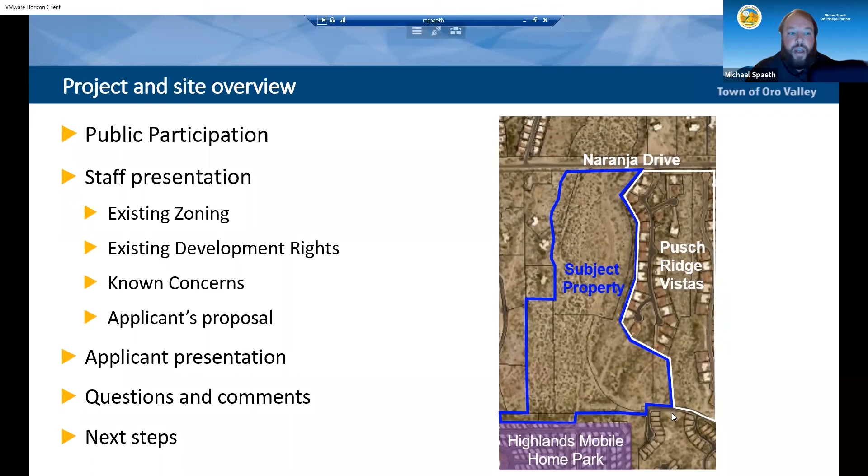So let's get started. First, I'd like to take a moment to orient everyone with respect to the subject property. The property is approximately 58 acres in size, located south of Naranja Drive, approximately 1/4 mile west of North First Avenue, as shown on the image on the screen and outlined in blue.

The property is bounded on the east by the Pusch Ridge Vistas subdivisions, shown in white, on the south by Highlands Mobile Home Park, shown in purple, and on the west by Custom Homes. Highlands Wash is shown in blue, north of the site across Naranja Drive, for additional context.

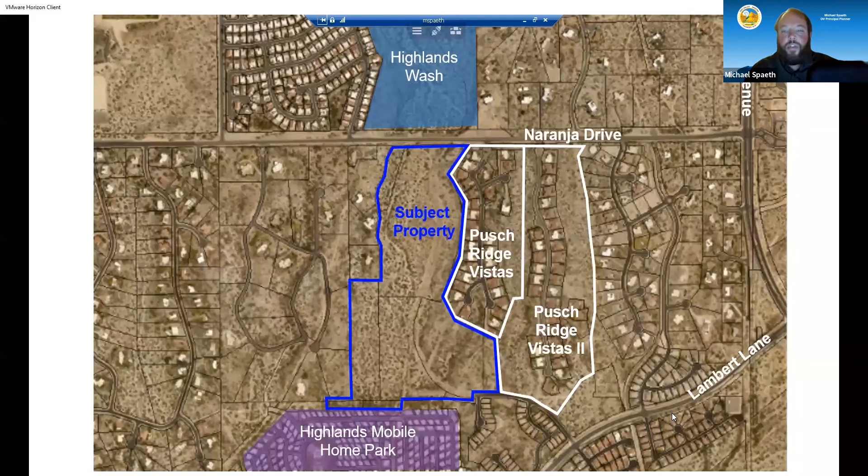Now that we're familiar with the property's location, to start, I'd like to quickly touch on several key takeaways we want everyone to leave this meeting with. I will go into more detail during my presentation, but want to make sure everyone understands these key items.

First, homes are already allowed on the subject property. Second, the approval for homes on this property was done by Pima County prior to annexation of the property into Oro Valley. Third, we are well aware of the ongoing drainage issues in the area, and we will be working with the applicant to ensure this project is a positive development for the area.

Fourth, if the plan meets code requirements, the town must meet its legal obligations to approve. If this was a new rezoning request, the town would not support a subdivision in this location.

But because it was previously approved by Pima County, if it meets town requirements, the town is legally required to approve the subdivision plan. Again, I'll go through each of these in more detail during my presentation.

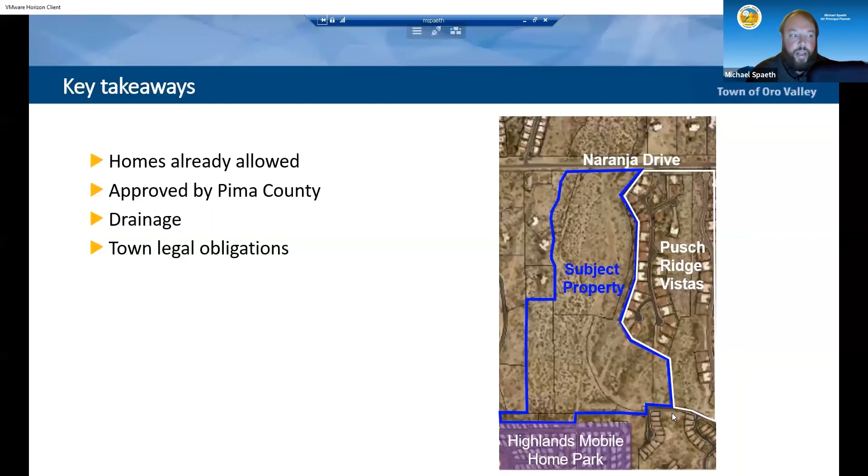The town requires applicants to engage in community outreach at the front end of the process before formal applications are submitted, as it is important to hear your comments and questions early and often.

Does your participation matter? Absolutely. However, because we involve neighbors early in the process, we may not have answers to a lot of the questions you may have tonight. Once we receive a formal submittal, we will have more information and can answer those questions during the second neighborhood meeting.

Typically, an in-person neighborhood meeting is held prior to the formal submittal of a subdivision plat application. However, the zoning code enables the planning and zoning administrator to approve alternative methods of public outreach when warranted. With the ongoing COVID-19 social distancing requirements, alternative methods are necessary and are the best solution under the existing circumstances.

So where are we in the process? An informational video was uploaded several weeks ago to ovprojects.com regarding the applicant's proposal. Hopefully you've had a chance to view that. If you haven't, we strongly encourage you to do so.

For those of you who have, thank you for taking the time and forwarding questions prior to tonight's meeting. Tonight we are holding the first neighborhood meeting. Property owners near the site have been directly notified by mail, and the site has been posted with yellow signs in multiple locations. If you weren't notified and wish to be in the future, please send us a request with your name and address.

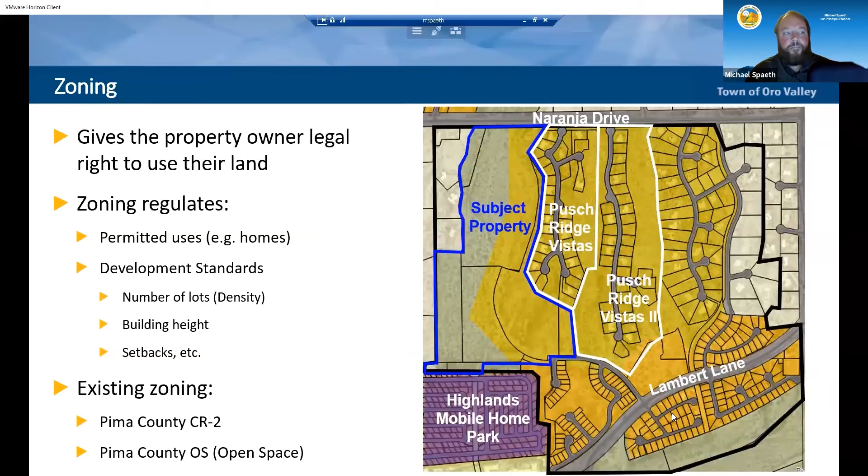Now that I've detailed what is meant by zoning, I'm going to quickly touch on the existing development rights for the property. We know the first question many of you will have is, how can you build in a wash area with steep hillsides? Again, this is an unusual situation.

Keep in mind, Pima County approved the plan for the entire PAD area, which includes this property shown in blue on the right-hand image. Once a legal right to develop is granted, it cannot simply be removed by the town. As opposed to a rezoning where an applicant is asking for new development rights, the right to build homes on the property has already been approved.

During the neighborhood meeting process, we will be focused on site design and code conformance. The town may, and does, require compliance with current drainage, street, sewer, and other town standards, but we cannot deny the application if and when it is deemed code compliant. Put more simply, if the property owner demonstrates that the proposal meets all town requirements, it must be approved.

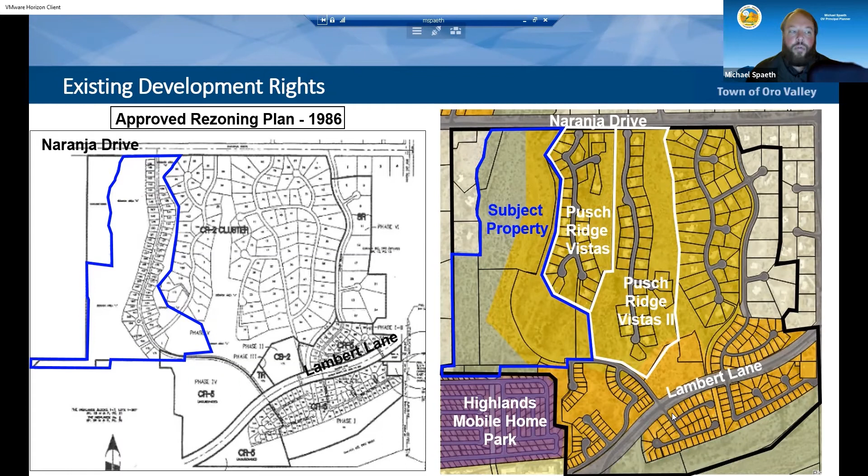Although developing in such a wash area with steep hillsides may not make sense to many, the property owner has the legal right to develop their property as represented on the approved rezoning plan approved by Pima County.

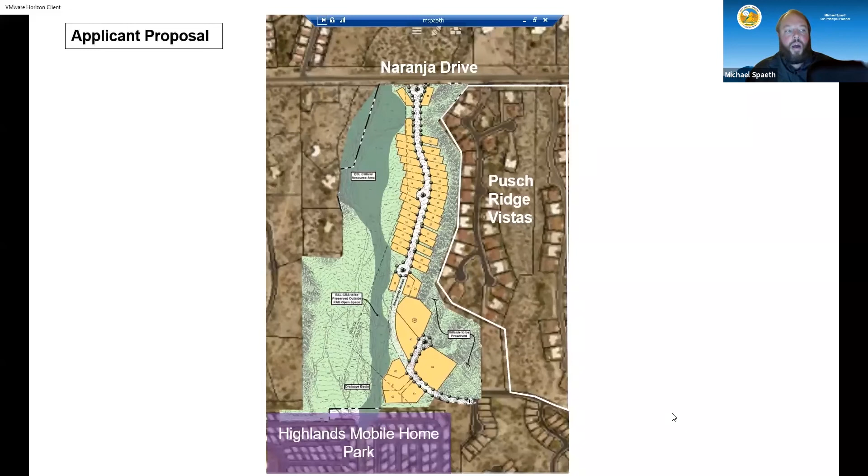The applicant has proposed a site plan with 46 detached single-family lots with access from both Naranja Drive on the north and Shorecliff Drive on the south. Mr. Olin will provide more detail regarding the concept during his presentation.

Now that I've provided an overview of the applicant's site plan at broad strokes, I'd like to quickly touch on a couple of known issues affecting the site that we heard during earlier neighborhood meetings and through ongoing public works efforts in the area.

The town is well aware of the existing drainage concerns in the area, specifically those affecting the Highlands Mobile Home Park south of the site. Because of that, we required the applicant to provide a much more detailed drainage proposal prior to scheduling this meeting. This isn't usually required at this point, but considering the existing drainage issues, we required additional evaluation before meeting with neighbors. Though we did require more detail at this point, as I stated earlier, we don't have all the information we will need, which will be provided with the formal submittal.

Again, we want to involve neighbors early in the process. Ultimately, the applicant is going to have to design a drainage concept that does not adversely impact water coming onto or leaving the property. They need to design a system that handles internally any increases in runoff caused by their development. Again, we will be working with the applicant to ensure this project is a positive for the area.

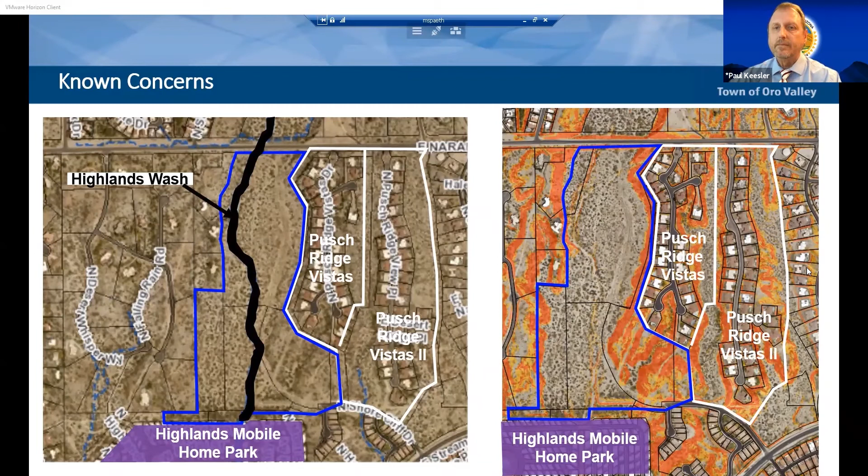So with that, Mr. Spaeth, I'd like to turn it back over to you. Okay, thank you very much, Mr. Keesler. Now I'd like to turn it over to Mr. Olin, representing the property owner, to discuss the what and why of their proposal. Mr. Olin, you should be unmuted and video ready to go.

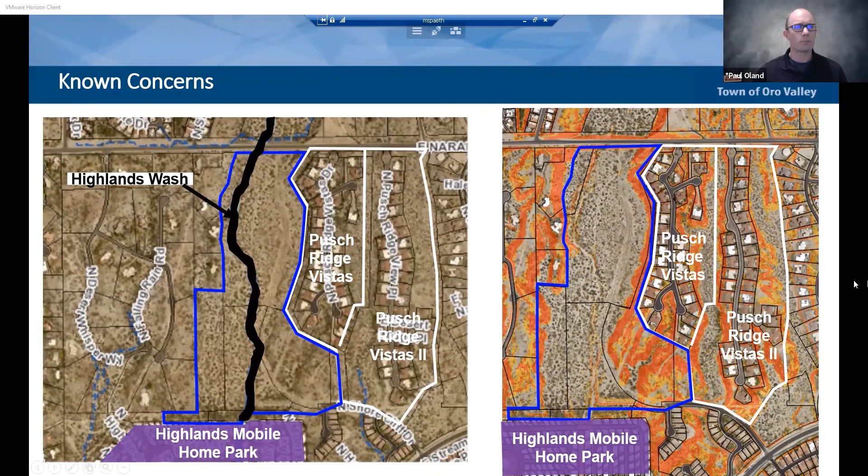As Mr. Spaeth mentioned, I'm representing the property owners and Meritage Homes. Also on the call is Dennis Roberts with Atwell Engineering, whose group performed the initial drainage analysis Mr. Kiesler referenced, and will be handling all the civil engineering on site for grading and other designs. He's available to answer technical questions.

Mr. Spaeth did a great job explaining the existing entitlement, the existing zoning, and the history there, so I won't repeat that. I wanted to hit some highlights of the plan we're proposing, and then I'm sure there will be a number of questions. So just to make a very quick comparison here...

This involves several design considerations, one of which has to do with the wash and the drainage, as Mr. Kiesler indicated.

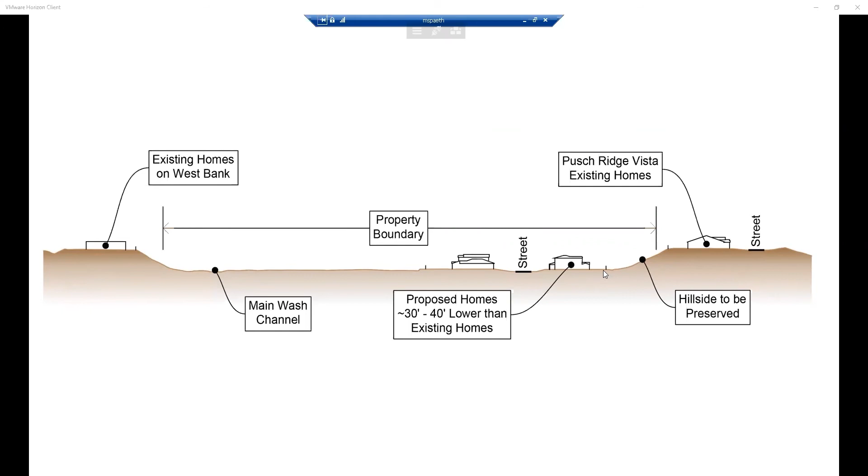Quickly, it was touched on, my concern is the eastern hillside. On one of the slides, there was a horizontal image where it looked like a small retaining wall on the east side behind a home, and it looked like nothing was being done, the hillside was not being built into. My concern is if you're allowed to go 20 or 25% into the hillside and the bulldozer comes in and just digs that out, what's the potential for the whole hillside to collapse and the properties up on top to just wind up at the bottom? It's a little extreme, but just to make the point. So yes, that's the picture where it says hillside to be preserved, and then you see the little vertical line behind the home. Is that a wall or something? Down to your left, yeah, that one. Is that a wall? Is that as far as they're going to go, or are they actually going to dig into the hillside? My concern is collapse because it's clay, sand, not concrete, and we don't want our backyards down at the bottom of the wash. Thank you again.

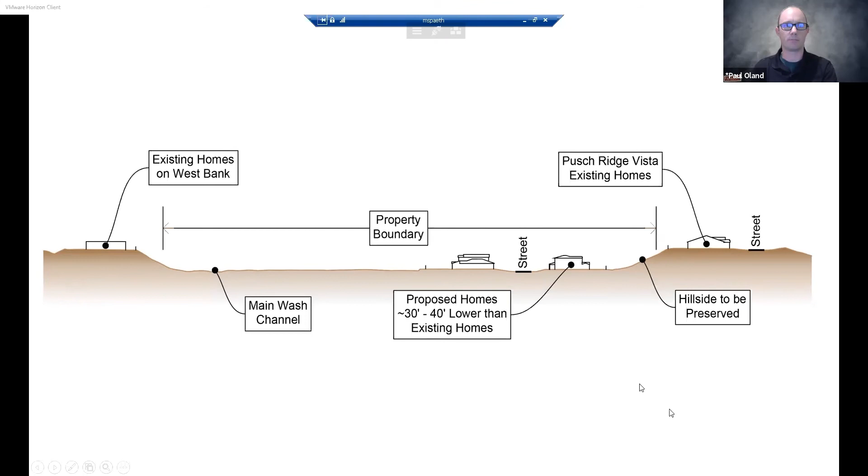Okay, thank you, Mr. Oland. Sure. So that little line there is just meant to represent graphically a rear yard wall for that home. If you can go back to the last slide though, that shows the site plan. As I mentioned, one thing we've done is pulled the rear edge of these lots down that hillside much more compared to the existing plan.

Meritage does not want a big ugly riprap wall behind those residents either, as that would certainly affect their sales and values. But where we do need to cut into the lower portions of those hillsides, they'll certainly need to be stabilized according to town rules, and that'll be part of Atwell's overall engineering design.